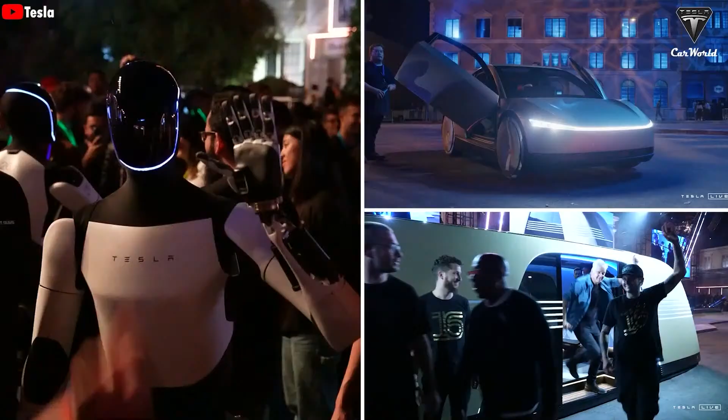It is hard to believe that in just over an hour, Tesla introduced three super products. But instead of the crowd focusing on the two new cars, the people at the event focused on Optimus, because this is the first time they could talk in real time with a humanoid robot. It can answer questions in just one second of thinking. The important thing is that the answer is completely unprogrammed.

It thinks and answers by itself. Not stopping there, Tesla also showed a series of new actions of Optimus to prove that it is worth much more than the $20,000 that customers spend, homemaker ready.

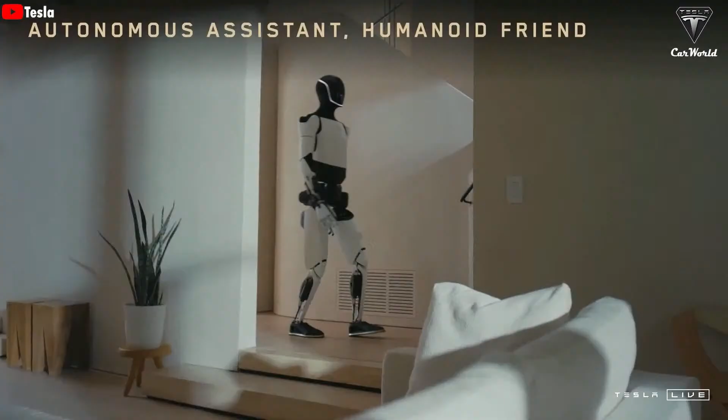It's incredible to see Optimus pick up a package, check it, and bring it inside the house. You can also see it watering the plants, interacting with family members, or even more insanely, opening the trunk of the car and taking the items into the house. The robot's movement speed is much better than earlier this year, and the way Optimus's hands move when holding objects is incredibly secure, and the whole arm can be manipulated quite naturally.

So it can be a teacher, babysit your kids, it can walk your dog, mow your lawn, get the groceries, just be your friend, serve drinks, whatever you can think of, it will do.

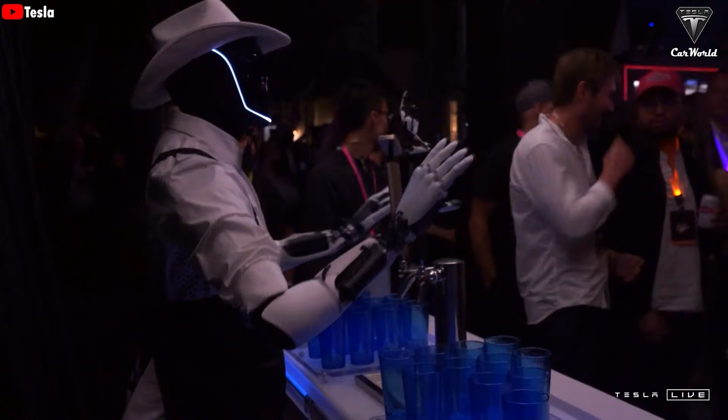What does this mean? Clearly, all these new upgrades and tasks show that Tesla is truly turning the Optimus robot into a versatile homemaker, something no other competitor has come close to achieving yet.

But that was not the most impressive thing at the event. Elon Musk inspired a party that most people enjoyed when a team of about 7 Optimus robots performed a pretty professional dance, one of which was also dressed in clothes and a cowboy hat, acting as a bartender, serving drinks and giving gifts to the event attendees.

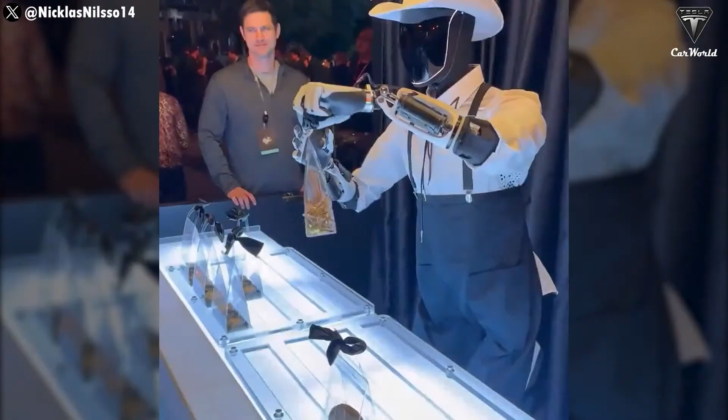While these aren't custom-made drinks, just two pre-made drink options served from a beer tap, the robots seem to have done a pretty good job, although they do wobble a bit when serving drinks, which seems odd, as if the robots aren't very good at balancing, or their movements aren't properly damped. Or maybe it's the clothes and hat that make it seem even more distinct.

Before this event, Tesla had never shown any videos demonstrating Optimus's interaction capabilities, leading many of us to believe that these robots could hardly recognize and communicate with humans. Oh my God, and we were all wrong.

The Optimus robot truly stole the spotlight, and what had people talking even more than the robo-taxi technology was its astonishing ability to communicate and use body language.

It was so impressive that many assumed Optimus's voice had to be controlled remotely. There's no way a chatbot could operate in real time like that.

And you can see, here is one of the videos that shows the amazing interactivity of Tesla Bot.

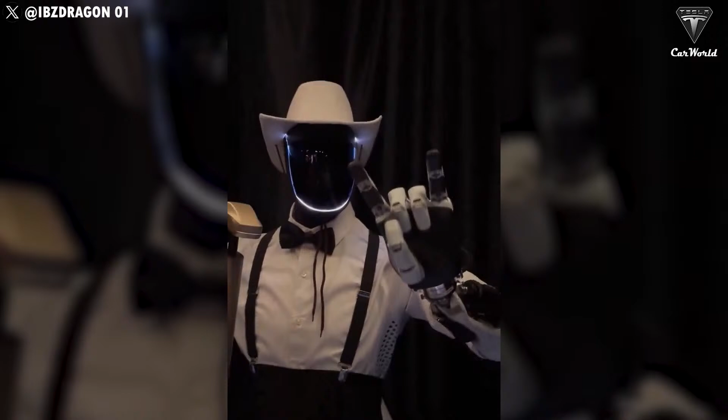I got another one. There you go. Oh. Yeah, hell yeah. Yeah. Can you give a hell yeah, Optimus?

Not only that, it also asked the user's name and sang him happy birthday, which further increased the amusement of the surrounding crowd.

I'm Chad. Chad? Yes. All right, everyone, let's all sing happy birthday together while I dance. Yeah, baby. Do it. Happy birthday to you, happy birthday to you.

It's clear that it answered all the questions posed to it succinctly. These were random questions from event attendees, and they weren't preset or programmed to give the same response. It's obvious that it used AI to think and come up with its answers, which is what drew a crowd around Optimus.

Even more so than the event's main attraction, Cybercab. This shows just how captivating Tesla's humanoid robot really is.

Each robot we saw had a different voice, even though most of them had either a California or Texas accent, which are two places where Tesla has a significant presence. One of them was even said to speak Spanish, impressing an attendee.

In reality, having a humanoid robot that can communicate isn't all that difficult for Tesla. What makes it impressive is how it uses body language and performs actions along with its responses. For instance, instead of just saying 'Happy birthday,' it actually sang. You can even ask it to strike poses or perform actions, and it follows through.

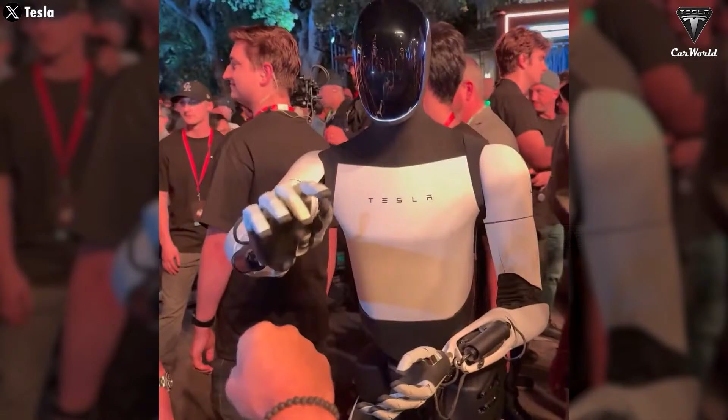Another instance caught our eye, which shows how close the robots are to behaving like humans. Here, the user asks the robot whether it knows how to play rock, paper, scissors. It is interesting that the robot was well aware of the game and its rules. And then it was literally human versus robot. And guess what? Humans are still better. But one thing is clear, Optimus is not a sore loser. It complimented the opponent saying, 'You're very good at rock, paper, scissors.'

You might not know this, but Tesla is really good at gathering training data. Even this event generated a ton of training data for Optimus, meaning everything it was asked to do is recorded. It will remember the faces of everyone who interacted with it.

This is exactly what customers want from Tesla's humanoid robot. Earlier, Elon Musk explained that we can even customize Optimus's language and voice. Musk said, 'Yeah, you'll be able to customize the personality, customize the voice, and really kind of the robot will kind of get to know you as well and know your preferences. You won't even have to say things because it'll just kind of understand you.'

What if we got bored and could chat with it for hours looking for some knowledge instead of using ChatGPT? We could listen to it tell stories, share news, give weather updates, or even ask it to clean the entire kitchen and cook dinner. Oh my God, it can clearly do all of that.

Elon Musk has made extensive predictions about Optimus's potential, declaring it to be the biggest product ever. He anticipates that Tesla will eventually produce millions of them, suggesting that widespread adoption of Optimus could elevate economic output by two levels and contribute to a future without poverty.

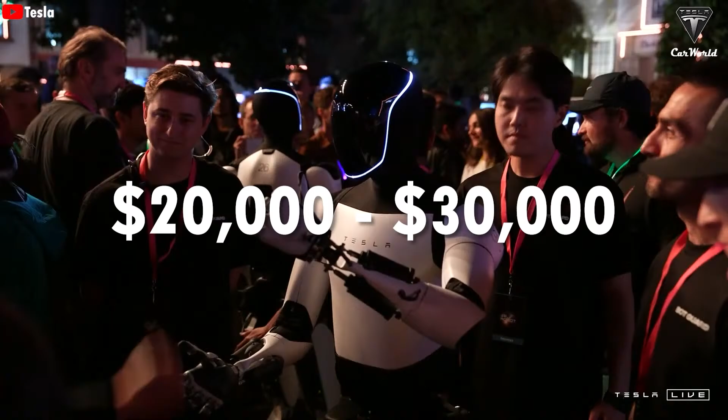Earlier this year, Elon Musk confirmed that Tesla could start selling its humanoid robots by the end of 2025. He revealed that in the long run, the price of the Tesla Optimus robot is expected to range from $20,000 to $30,000 when production reaches a large scale. This means that in the initial phase, the price could be significantly higher due to substantial research and development costs, an optimized manufacturing process yet to be established, and the mass adoption of advanced technologies.

In our most optimistic estimates, the starting price for Optimus could fall between $50,000 and $70,000. While the initial price may be high, there is no denying that Optimus can be a valuable long-term investment that will allow us to recover our investment very quickly.

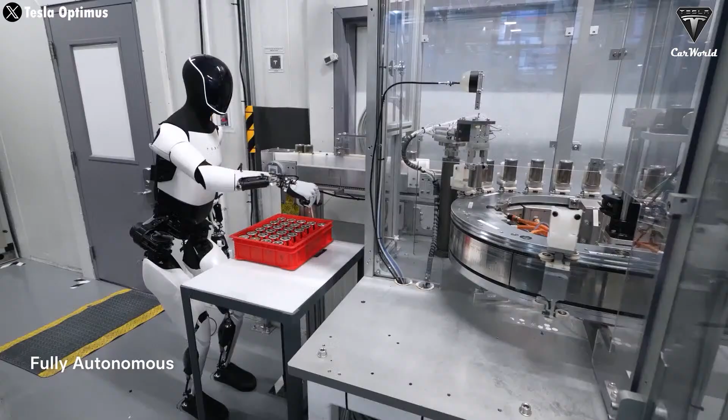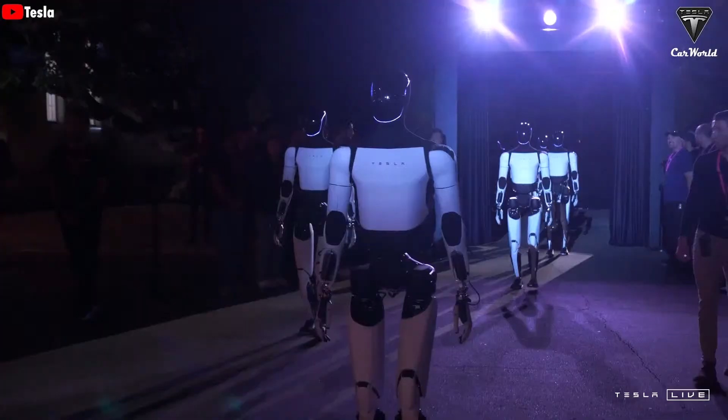With the ability to automate manual tasks, from industrial production to care for the elderly and disabled, Optimus not only helps reduce labor costs, but also significantly increases productivity. In addition, as technology continues to improve and optimize, the benefits of robots will far exceed the initial cost, especially in industries with high automation needs and continuous performance requirements. So while the starting price may reach $50,000, the potential cost savings and increased value that Optimus brings in the long term can easily make up for this initial investment.

Don't forget that this is just the initial cost. When Tesla has enough quantity, it will definitely drop to $20,000, half the price of an electric car, as Elon Musk said. In the initial phase, according to Musk, Tesla's Optimus Gen 1 will mainly be used internally at Tesla factories, with around 1,000 units or more to support production and refine operational processes.

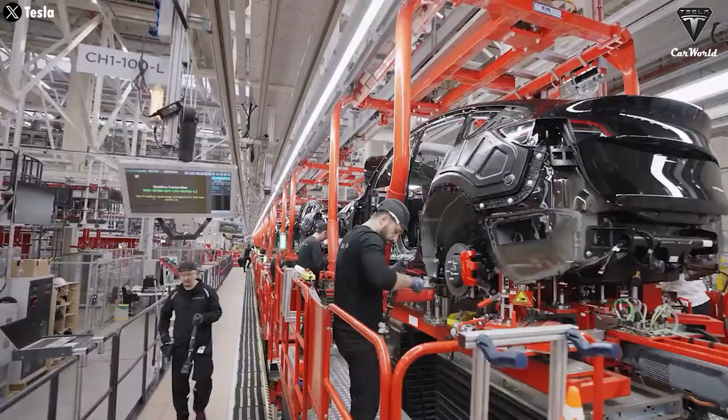This will allow Tesla to replace some workers in an effort to reduce labor costs and optimize the utility and performance of Optimus before it officially hits the market. Generation 1 will be quite limited, and Tesla might not sell it to customers.

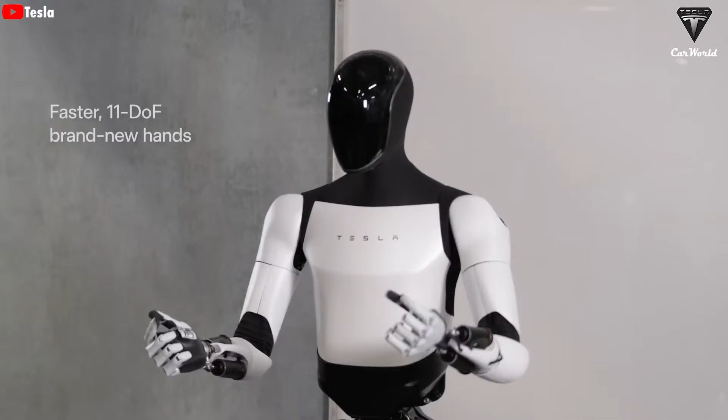When Optimus Gen 2 becomes available, Tesla plans to start offering it to external customers, including high-profile individuals and large corporations facing labor shortages, such as Amazon, FedEx, and Walmart. These are the potential early adopters of Optimus, and they may be willing to pay as much as $50,000 or more to own one of the first robots.

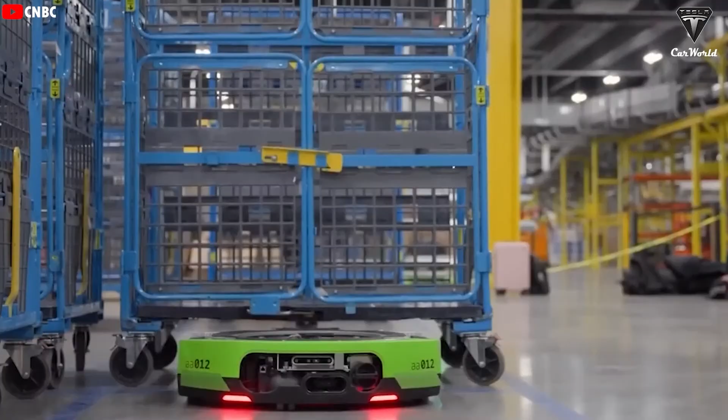Not only because of its advanced automation features, but also due to the brand value and exclusivity of the product. Businesses can use Optimus to enhance productivity and operational efficiency, while celebrities might see the robot as an assistant that helps them tackle tasks they don't have time for. Tesla stands to benefit significantly, as celebrities using Optimus would provide substantial marketing for the company. Prioritizing the distribution of Optimus to celebrities and large companies could create a powerful ripple effect, generating interest and rapidly expanding the market for this product line.

Before Optimus goes on sale, Elon Musk has also mentioned that the company will offer a rental program for the robot as a way for customers to experience the product before making a purchase decision. We anticipate that the rental price won't be too high, estimating it to be between $100 and $500 per month.

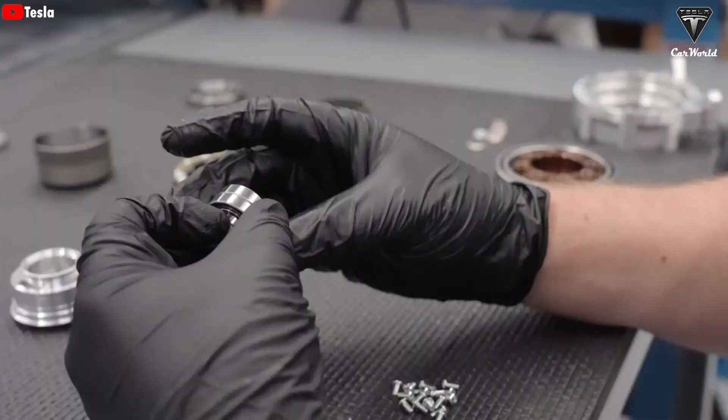There's no denying that this year, Tesla has put a tremendous amount of effort into rapidly refining its robot. You need to understand that creating something humanoid has never been easy. However, for a company that specializes in electric vehicles, to take less than 3 years to bring a humanoid robot to events and showcase its various capabilities is truly impressive. Tesla has really outpaced its competitors, even those companies that specialize in robotics like Boston Dynamics.

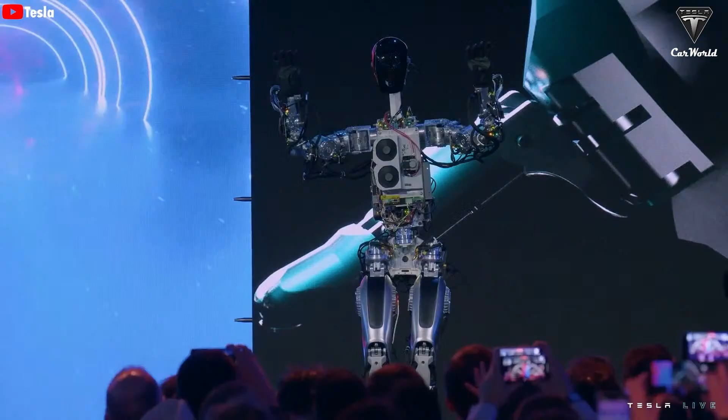This earthquake really broke out at the end of last year, when Tesla suddenly launched the latest version of the humanoid robot, Optimus Gen 2, which no one expected, because in March Tesla released Gen 1 — meaning it only took about 8 months for them to upgrade to the high-end version. Not only did it bring a robot with a smarter, more modern design and eliminate a large amount of metal, Optimus Gen 2 also brought notable upgrades: a pair of faster legs, a hand with more joints and tactile sensors, and a smarter brain.

Not long before that, the video of Optimus demonstrating a new skill of folding clothes in a few seconds attracted attention. In the clip, the robot picked up a shirt from a basket and folded it neatly on the table. This was the moment when everyone believed that Tesla had really developed the role of homemaker for Optimus.

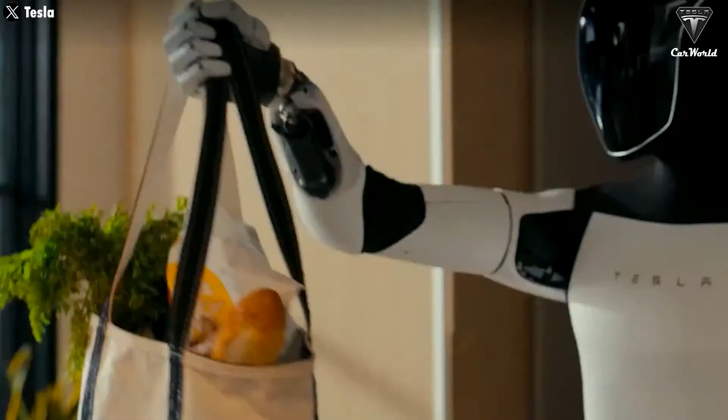After the We, Robot event, we realized that the reaction to Optimus's real-world debut was quite mixed. While the majority of users praised the technology for being far superior to any competitors, and its interactions were surprisingly impressive compared to what attendees had imagined, some others felt differently. They believed the robot's interactions seemed to have some human interference, suggesting that Optimus was actually being remotely controlled, and that the responses it gave were being provided by Tesla employees.

The truth is, when something appears too good to be true compared to our expectations, people tend to jump to negative conclusions. We don't believe Tesla would be foolish enough to host a major event, bring at least 37 humanoid robots, and have guests witness them being controlled remotely. They wouldn't be dumb enough to risk a pre-programmed robot crashing their stock, which had already risen thanks to the Cybercab. As you can see, the event was very crowded, with people standing close together, so if Tesla employees were manipulating and controlling the robots, they would have been detected immediately.

In addition, Tesla would not have produced large numbers of robots in the first place if they were not technically advanced. So when we saw such a large number, this means Tesla had already qualified the technology for these robots instead of bringing unfinished machines to the event. We think Tesla produced more than the 37 units that appeared at the event, as some others were still being assembled and built in the factory.

So the fact that the Optimus robot was remotely controlled during the event was just a negative comment meant to make people underestimate Tesla and their robots — not to mention whether it was actually controlled or not. Its manipulations, actions, and skillful hands prove that Tesla is far ahead of its competitors.

We'd like to talk a little more about the Tesla Cybercab and Robovan, two models that are also being widely discussed. As for the affordable car, the $25,000 Model 2, we'll talk about why it wasn't unveiled at the event in the next episode.

As we have seen, not only Optimus, but Cybercab and Robovan are also two fully self-driving models of Tesla. They are considered robots, but have wheels instead of legs like Optimus.

With Cybercab, it is completely different from what people have speculated before. Cybercab has a compact design, like Cybertruck but more sophisticated. The entire car is painted in glossy gold, with details made of stainless steel to optimize durability.

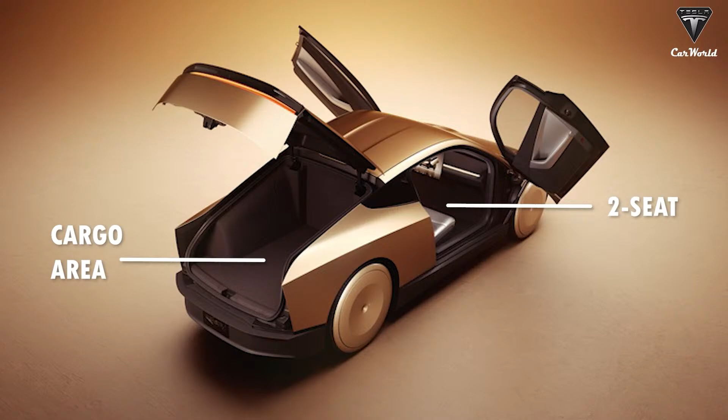Notably, the car is equipped with a self-cleaning system to maintain hygiene, particularly useful for frequent use as a self-driving taxi. The expected price is under $30,000, and the operating cost is around 20 cents per mile. The Cybercab has a range of about 200 miles and can be wirelessly fast-charged in just 15 minutes.

With the Cybercab, Tesla emphasizes that they rely solely on cameras and AI software, no radar or LiDAR needed. In the future, Tesla may allow owners to use their vehicles as robo-taxis to generate income, where Tesla would take 30% of the revenue and the owner would keep 70%.

Meanwhile, Robovan blew people's minds with its unique design. Robovan can carry up to 20 people or transport large goods at an operating cost of $0.05 to $0.10 per mile. Like Cybercab, Robovan will have no pedals or steering wheel, just seats and large screens inside the car. According to the event, Tesla will focus on Robovan in future events, considering its ability to serve as public transportation.

Optimus has become an important part of Elon Musk's long-term strategy, as he envisions the robot playing a key role in Tesla's future. Since its debut in 2021, Musk has envisioned a future where Optimus can not only do everyday human tasks like housekeeping and cooking, but can also be used in industrial and commercial environments. Musk even believes that Optimus could be a huge revenue generator for Tesla, turning it into a financially limitless product.

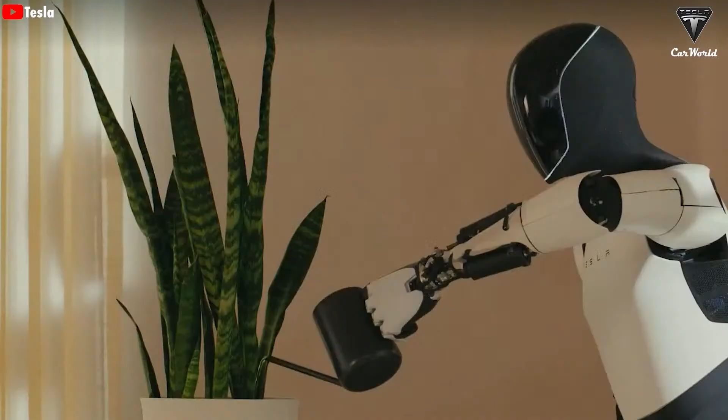In our opinion, it will probably be a year or two before consumers see Optimus bots in their homes. By then, it will have a lot of utility and features that go beyond what is available today.

What do you think of Optimus after Tesla's recent event? What do you expect from these robots? And discuss the issue of it being remotely controlled in the comments below. We want to know your views.

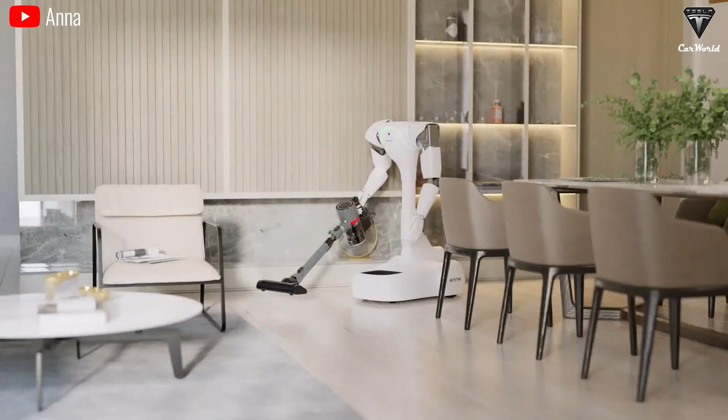Just imagine coming home from work with a pile of house chores still waiting for you. Yeah, it's going to stay that way until you have an Optimus living at home with you. The reality is, the idea of owning a robot at home and asking it to handle a bunch of tasks that you either can't or don't feel like doing has never really caught our attention, because no one thinks a slow-moving robot is actually going to replace us humans. More accurately, this scenario has only existed in sci-fi movies. However, Optimus is that real-world robot stepping straight out of the movies you've watched, with the exception of T2.

But seriously, it can fold clothes, water plants, handle slippery objects like eggs or battery cells, and even use a computer. It can also dance, it can squat, it can move around the office with an incredibly natural human-like gait. So you could say pick up a cup, pick up a shirt, fold the shirt. These things will generalize, I think, quite quickly.

But that's just the most basic glimpse we've seen of the Optimus. Imagine putting it in a clothing store where it can fold and pack thousands of shirts for customers every day. No more having to pay people to do all that. Farms wouldn't need complex irrigation systems if these robots were involved. Or even crazier, it could grab eggs and make breakfast for the kids every morning.

So, stepping out of the realm of movies, this is the real-world role of Optimus. It brings mind-blowing convenience, some of which can directly translate into financial benefits for businesses using the Tesla bot. However, to achieve all this, Optimus's hands are considered its most critical feature, and it's where the Tesla bot team has focused most of their attention.

Just like humans, we'd be almost incapable of doing any task without our hands. A pair of hands with 27 degrees of freedom combined with a brain are two things that make us humans the most intelligent beings on the planet. Now, when manufacturers create a humanoid robot, the brain and hands are the two areas on which they focus most.

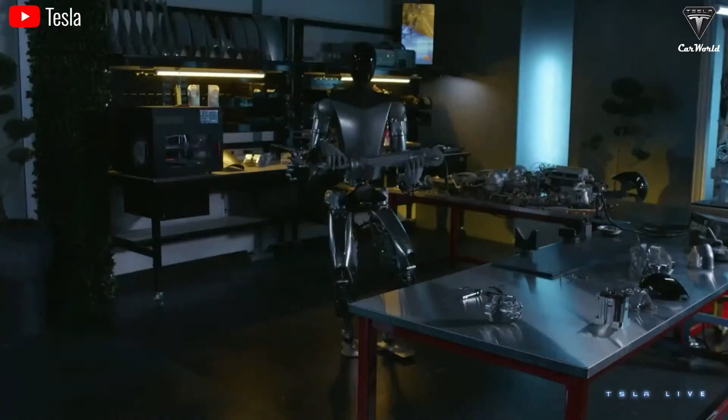As we've mentioned before, our hands have 27 degrees of freedom. However, some of you may not fully understand what degrees of freedom in the body actually means, so let's review real quick. Simply put, degrees of freedom describe the number of ways a mechanical system can move. In the context of a humanoid robot's hand, it refers to the independent movements each finger or part of the hand can make. As you can see with Tesla bot's hand, it can continuously move its fingers like a normal human's, which is something Tesla's competitors have not quite figured out yet.

If you want to have a humanoid robot that can do things that a human can do, it's a very high bar. So our new hand has 22 degrees of freedom instead of 11. This is what Elon shared about the latest hand design for Optimus.

To develop the world's most advanced robotic hand, the key component that makes Optimus truly useful for humans, Tesla has had to overcome some major hurdles. In a conversation with Lex Fridman, Musk admitted that the hand for Optimus accounted for about half the engineering work during development. Because, like humans, much of our intelligence is tied to what we can do with our hands, Tesla's upgraded from 11 to 22 degrees of freedom, a leap that doubles the previous version, bringing them just 5 degrees shy of a human hand.

Imagine if in the future Optimus gets 27 degrees of freedom. Now, that might not happen immediately, but if it does, its hands will reach an incredible level of complexity and sophistication, unlocking potentials far beyond what we can imagine.

With hands like that, what else could Optimus do? More complex tasks, of course. It could handle intricate surgeries, perform delicate laboratory work, repair advanced machinery, or even create art. The possibility for high precision tasks in fields like healthcare, engineering, and manufacturing would expand tremendously, potentially reshaping industries and everyday life. Like in 2026, it's really the kind of thing where you could tell it to do a wide range of tasks.

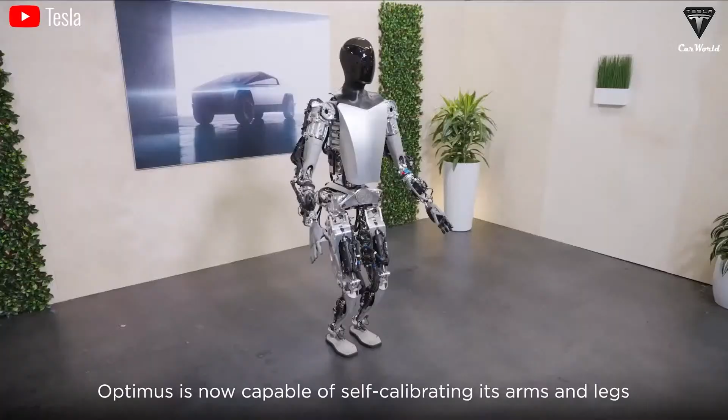You need AI, you need to be the best in real-world AI, and Tesla's the best in real-world AI. Optimus is equipped with Tesla's artificial neural network and advanced computer vision systems. Thanks to Tesla's neural network, Optimus can learn and handle complex tasks just by observing for the first time, and it can relearn really quickly, as Musk said. It can watch a video of something like a person doing a task and then learn just by looking at that video and do that task.

A lot of people are wondering how these robots will learn new tasks and how long it takes to train them before they can get the job done. Obviously, they just need to watch a video, and you don't have to do anything else. Imagine if you had a robot like Optimus at home teaching you how to play the piano, something you feel like you can't teach yourself. It just watches a video of someone playing your favorite song, then analyzes the hand movements, the chords, even the rhythm, and guides you step by step, just like you're learning from a human teacher.

Our next generation has 22 degrees of freedom. It will be able to play the piano.

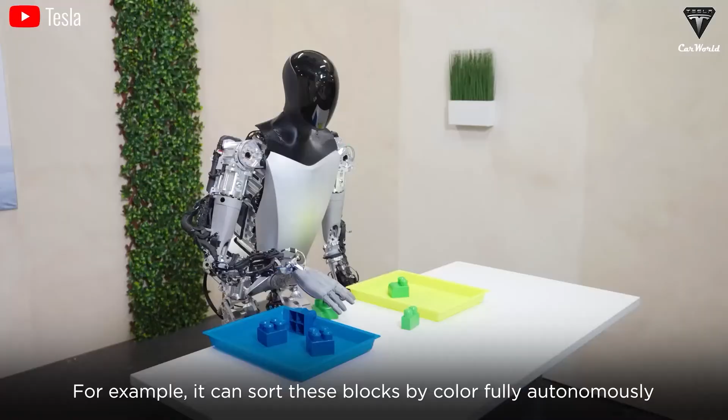So it's really like, wow, that would be amazing. You wouldn't just get instructions—you'd actually get the robot to demonstrate it for you, correcting you if you got the wrong chord or lost your rhythm. It could even create a fun practice session, encouraging you to improve every day.

And what if you like cooking? You could pull up a video showing how to make your favorite food. The robot would watch and learn from that video, then help you from start to finish. It will remind you to gather the ingredients, guide you step by step, and even adjust the recipe to suit your taste. Instead of fumbling through a cookbook or watching a long tutorial, you'd have a personal chef right in your house to assist you.

Those are the more complex tasks that Optimus can do with its hands. While the artificial neural network allows Optimus to self-learn new tasks, its computer vision system ensures the robot accurately perceives its surroundings and objects. In the promo videos Tesla has shown us before, the vision system simply allowed it to recognize objects in color, sorting them accordingly.

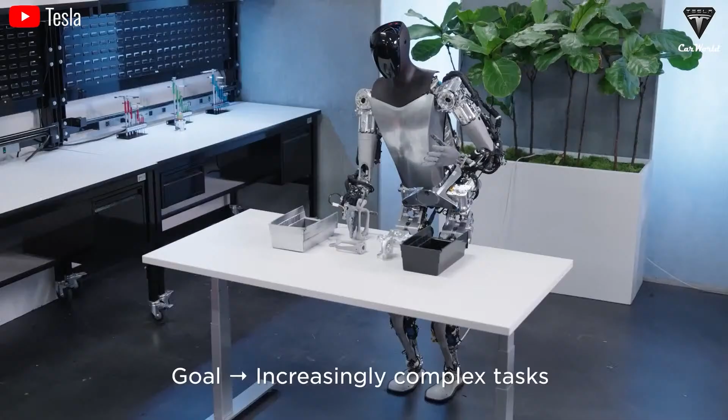The reality is, this vision enables Optimus to accomplish tasks you wouldn't even expect. Thanks to this system, the robot can analyze and accurately identify everything around it. For example, when moving around the house, Optimus can recognize objects like tables, chairs, even a cat lying on the floor. In more complex industrial environments, especially in a massive factory like Giga Texas, Optimus will also optimize terrain recognition capabilities. It can transport goods while ensuring the safety of those around it, recognizing obstacles like people, machines, and cargo, and deciding on the safest route to take.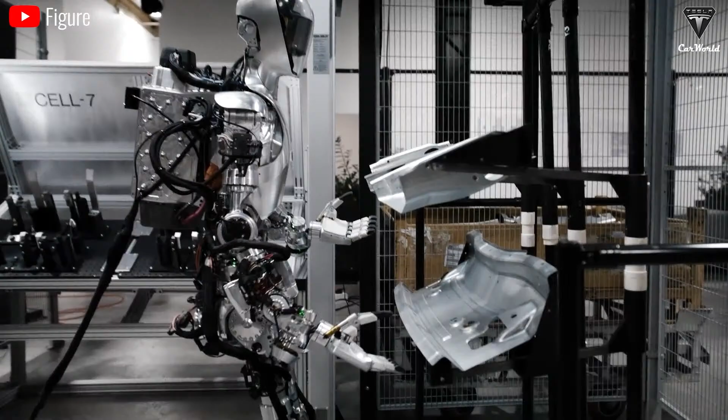With these capabilities, Optimus could become a valuable office assistant, helping you manage daily tasks. For example, it could quickly and accurately respond to emails, contact partners to send necessary documents, and remind you about your work schedule. Optimus could even organize meetings by suggesting suitable times for everyone and noting down important points during discussions. With its impressive actions and flexible movements in an office environment, the idea of Optimus as an assistant does not seem that far-fetched.

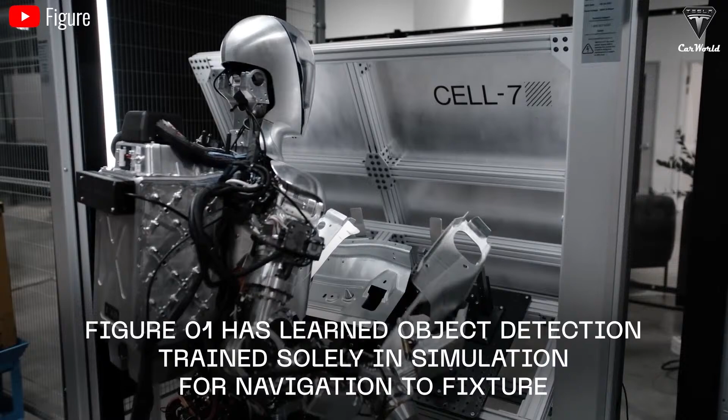In fact, it's possible that one day it'll be standing next to you, helping you work much more efficiently and making more money. There are many other tasks Optimus could take on, like educating kids or participating in EV production at Tesla, which Elon has already talked about. However, it's hard to go into detail since we still need to wait for its launch and final performance specs.

There are about 5 more updates that Elon announced for the Optimus Gen 3 version. In addition to its hands, Optimus will feature a new design using lighter materials to reduce the robot's weight. This design will include new features like LED lights and a display on its face to show work progress and status.

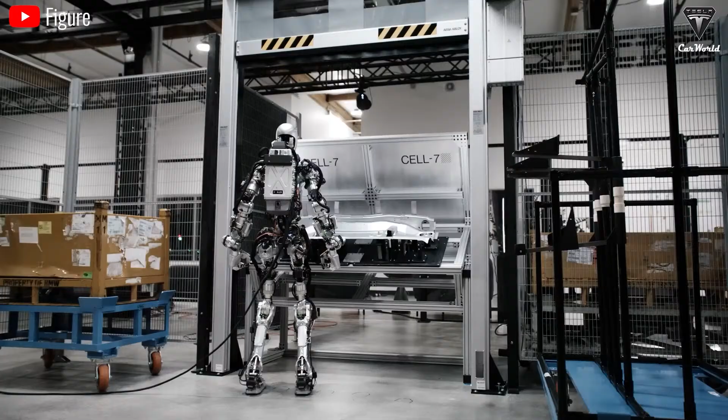Another upgrade will be movement speed. Right now, Optimus goes at a speed of about 0.6 meters a second, which is kind of slow, but Tesla plans to boost that from 2 to 3 meters a second. This upgrade will require improvements in hardware components like motors and joints to enhance efficiency and stability.

Elon confirmed that these hardware modifications are crucial for improving the robot's agility, allowing it to navigate different environments from factories to houses. Next up is the addition of voice and language, which is a crucial feature that will enhance user interaction. The upcoming Gen 3 version will be able to communicate in multiple languages and understand user preferences, making it more adaptable globally. Users will have the option to customize Optimus's voice and personality, allowing the robot to function like a personal assistant that can communicate naturally.

And finally, Tesla will focus on improving Optimus's learning and adaptability. With the implementation of video-in, controls-out neural network, the robot will be able to observe tasks and automatically replicate them. This development not only positions Optimus as a household assistant, but could also turn it into a healthcare companion, monitoring health conditions and giving timely alerts. By integrating with Tesla's existing FSD technology, Optimus will benefit from ongoing improvements in AI performance and decision-making capabilities.

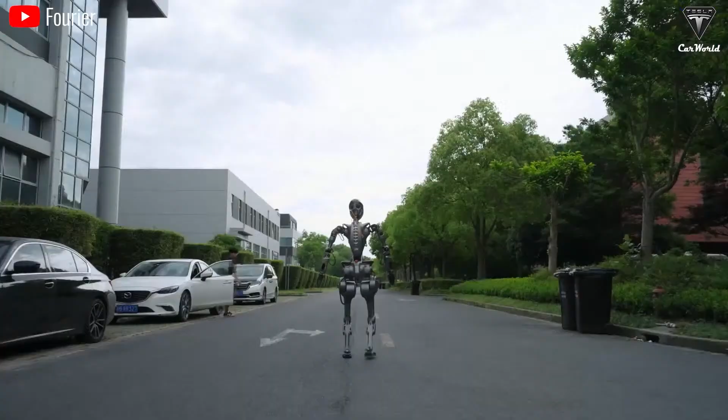These 5 upgrades will allow Tesla to reach new heights in developing an almost perfect version that can very closely mimic us humans, expanding its potential applications across various fields. After all, while Optimus is considered the world leader in humanoid robot technology and creates massive demand to change how people work, wherever there's technology, there's going to be competition.

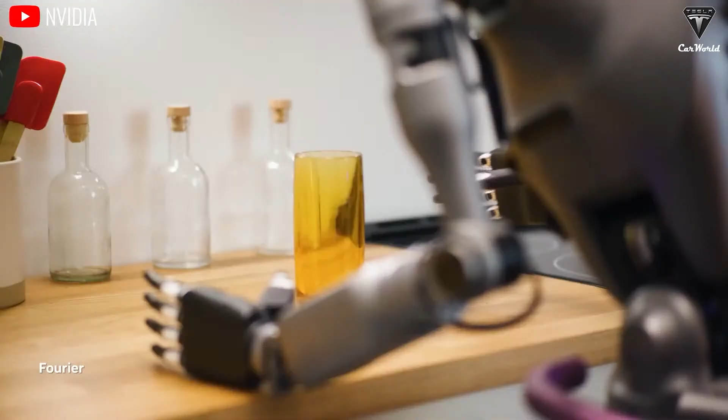And when it comes to tech, China's right there with it. So if you pay attention, you'll probably notice that since Tesla created a buzz with Optimus by launching the Gen 2 version late last year, a host of other robot companies out of China have suddenly come up out of nowhere. And when China focuses on something, it tends to become a trend because they'll likely flood the market with it. So robots are definitely what they're targeting.

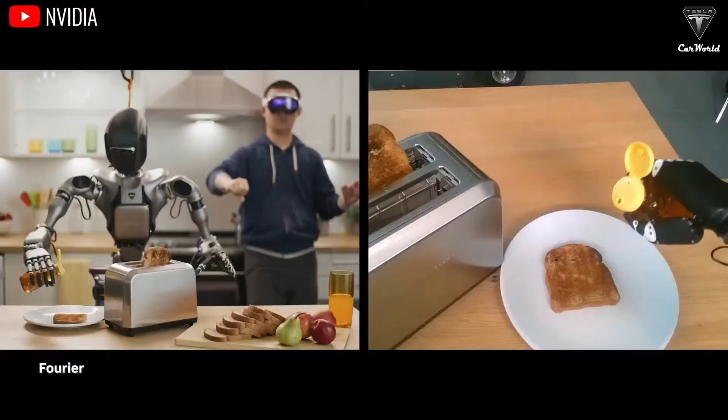Goldman Sachs predicted back in January that the global market for robots will reach $38 billion by 2035, with nearly 1.4 million shipments for consumer and industrial applications. They estimate that the material costs to make them dropped to around $150,000 each by last year, not including research and development expenses. To achieve a price of $20,000 for Optimus, Elon has had to break down numerous factors to make it accessible for customers.

If you look at a few humanoid robots currently out there, prices go from $70,000 to $120,000, so they're definitely not cheap. To hit that $20,000 price point for Optimus, Elon admitted that Tesla has managed to bring production costs down to just $10,000. The reason is that they have access to batteries, motors, sensors, and many hardware components that can be shared with Tesla's electric vehicles.

Moreover, they've got big factories for producing Optimus, and FSD software is already there, meaning they don't have to rely heavily on outside suppliers to make these robots. That's a big advantage for Tesla. Although Optimus is generating lots of buzz and demand, it still faces intense competition. With rapid advancements in China and other parts of the world, Tesla will need to adjust its production to keep up with the increasing demand and technological progress. Optimus could be the key to the next major revolution in automation.

From impressive developments in robotics like Boston Dynamics' Atlas to Tesla's Optimus robot, we're seeing major advancements in robotics and AI. However, while these advancements promise to open up new opportunities, manufacturing and deploying them in real-world environments still present some challenges. Optimizing the physical processing capabilities of robots, along with their interaction with surrounding environments, is essential to realizing the vision of a world where robots can take on a wide range of diverse and complex tasks.

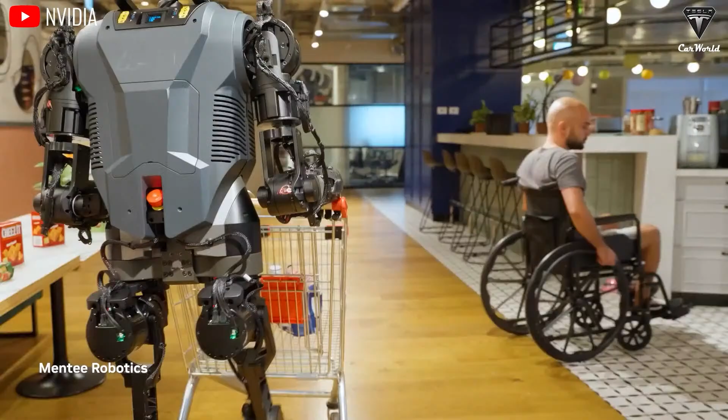While current robots mainly operate in controlled environments like factories and warehouses, their future will depend on the researchers' ability to develop not just software, but also hardware. As analysts have pointed out, to achieve general artificial intelligence, humanoid robots need a physical form to effectively understand and interact with the outside real world. The development of these humanoid robots and new designs, although promising, also needs to be approached a lot more practically.

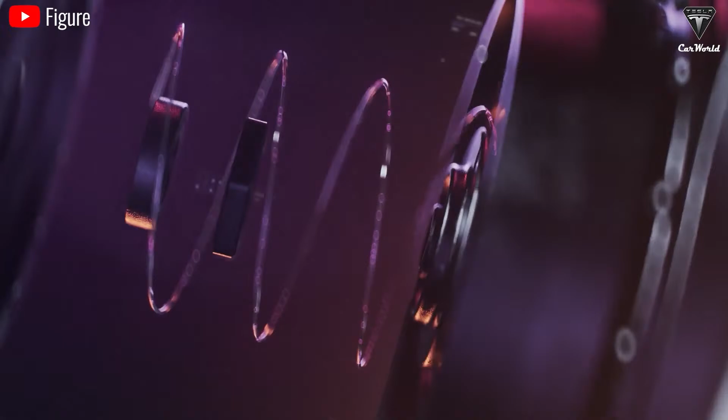Researchers emphasize that robot designs don't necessarily have to resemble humans. They should just be optimized for specific tasks. This indicates to us that as technology continues to evolve, finding the optimal design for each type of robot will be key to realizing their potential in our everyday lives.

So, we want to ask you, the viewer watching this video, what features do you think are more important for Tesla robots to meet your needs? And what are you most looking forward to in the next version of Optimus?

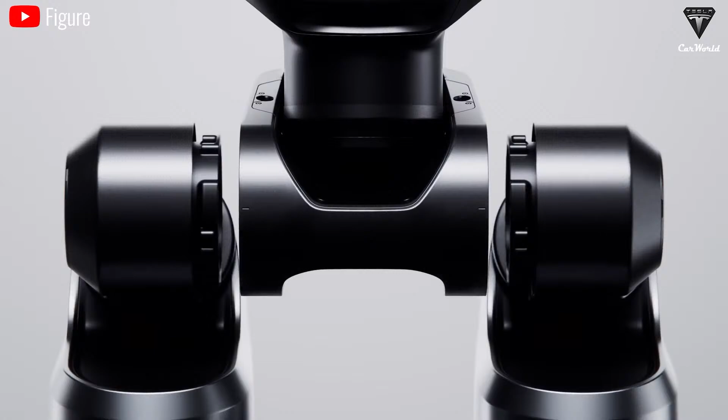Musk said it only cost Tesla $10,000 to make an Optimus robot, and he's planning to sell them to customers for $20,000. That means for every 100,000 sold, Elon makes $1 billion. Pretty wild, because he said he plans to make billions of Optimus, turning Tesla into a $25 trillion company.

Building a humanoid robot isn't like putting a Model Y on the assembly line. It's obviously a lot more challenging since it's AI. But Elon keeps saying Optimus is going to cost half the price of an electric vehicle. So what makes it so affordable?

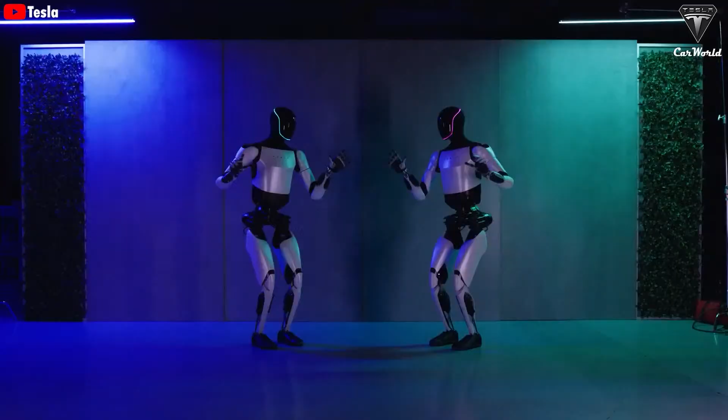So in order to have the robot not cost like hundreds of thousands of dollars, in order to make it cost like $10,000 or $20,000.

The truth we can't deny is that robots still haven't gained widespread acceptance among most people. In our opinion, the main reason for this is the lack of achievements or evidence proving that they're truly useful for customers who've got the money to spend. No one's trying to shell out $20,000 for a robot that functions like a toy that just moves from one part of your house to the other. Now, some ballers might be buying it, but the majority of us aren't.

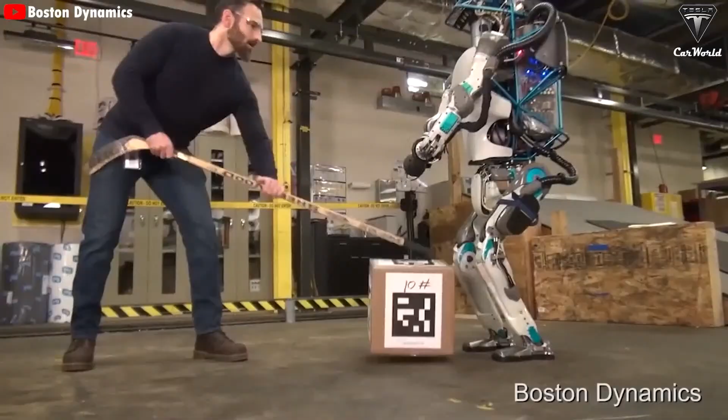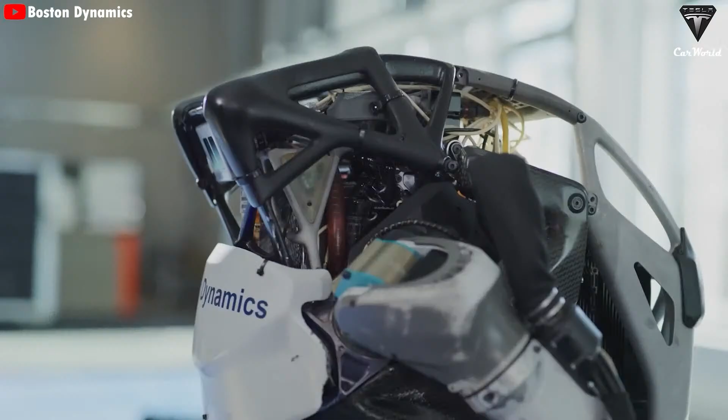From a certain perspective, we see that Boston Dynamics' Atlas has been highly regarded for its agility. It's one of the first robots to convince people as it's demonstrated the ability to do complex tasks like parkour and transporting goods, skills that most robots, including the Optimus, still can't do. However, its high price tag, around 150 Gs, equivalent to 2 Model S cars, makes it pretty inaccessible. That's part of the reason it hasn't gotten traction and essentially been shelved despite being developed over several decades now.

And we're not just talking the Atlas, it's tough to find any robot priced under $50K, and that's what makes Optimus stand out. Elon's mentioned at least 3 times that the price is going to be half of an electric car, with Tesla making it for just $10,000. It is expected to cost much less than a car.

I'll just bring it directly to the right here. I would say probably less than $20,000 would be my guess.

When talking about a price tag at $20,000 for something in Tesla, it's really unbelievable, and there's no guarantee that Elon can maintain this price when he's always the person who breaks his promises about timelines and the amount of money that customers have to pay.

But for Optimus, we have a basis to believe this price when almost all the expensive tech on Optimus is not purchased from suppliers, meaning that Tesla will transfer a lot of things they do from EVs to their humanoid robots. Relatively speaking, Tesla has the production capability, it has the engineering capability, and it has the AI hardware and software capability.

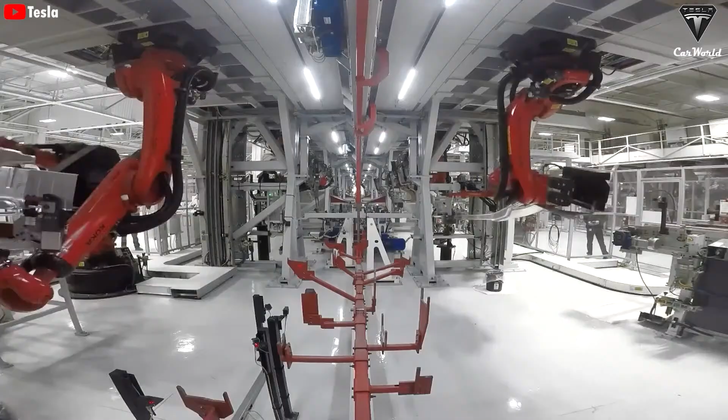Efficiencies gained from making robot cars and automotive manufacturing robots will immediately translate into the humanoid robot project. That's exactly what makes Optimus affordable. From the perspective of a robotics company, Tesla's got the right tools and talent to assemble the robots cost effectively.

According to Karpathy, who was still at Tesla when Optimus began, Tesla conducted a significant amount of research into self-driving tech and has become one of the most advanced autonomous driving systems out there now. All the knowledge gained and artifacts created while developing self-driving technology are getting transferred to the robot. This is what makes developing a humanoid robot less expensive.

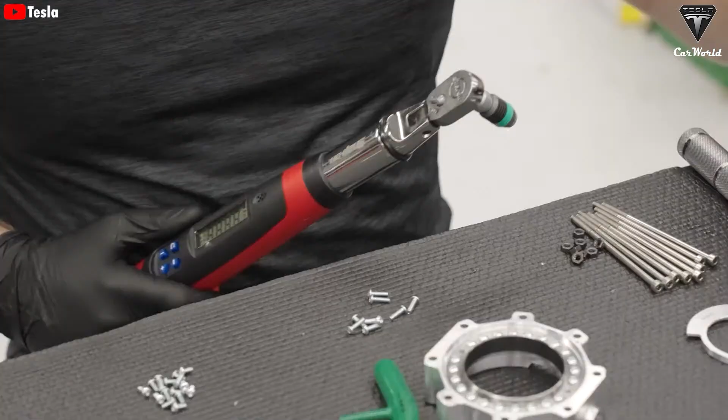So it's not surprising that Tesla's bot can get priced lower, especially among manufacturers. Truth being, only Tesla has the best potential for scaling up their production. Tesla's got large factories, battery production lines, and companies that don't need to get built from scratch.

Elon also emphasizes the importance of having some of the world's best electrical engineers in areas like drive systems and electric motors, as well as power electronics for developing Optimus. This is why the company can spend just 10 grand to produce it and bring Optimus to a market price of $20,000.

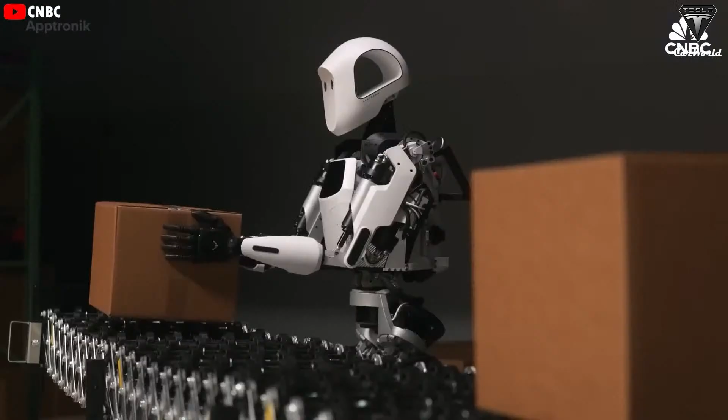Taking a quick look at Tesla Optimus, because besides being just a humanoid robot, most of us just don't know that much about it. Now, there are a few types of robots out there right now, including robotic arms that are used in electric vehicle production and robotic dogs, with each robot designed for specialized tasks.

Optimus, however, is getting developed to address the growing labor shortage by providing a potential alternative for manual labor. In the latest Gen 2 update, Elon mentioned that he envisions these robots having applications beyond industrial settings, doing household tasks, the boring, repetitive, mundane jobs that you just don't want to deal with.

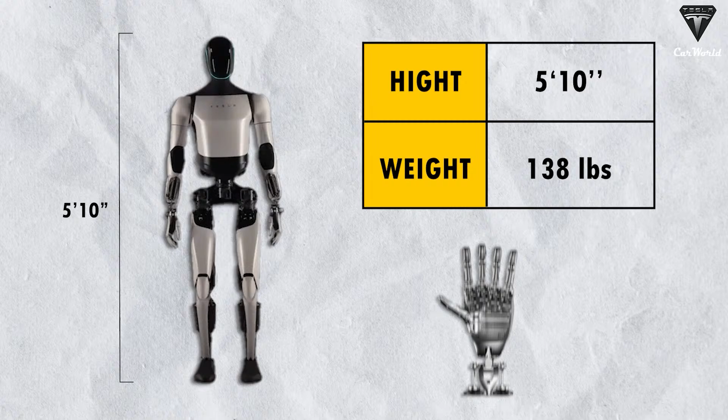Taking all human standards into account, Optimus is arguably the most human-like robot compared to much of the competition. It's got a standard height of 5'10", weighs 138 pounds, and features a fully articulated hand with 5 fingers, something very few robots achieve. The heart of Optimus will be a conventional lithium-ion battery pack, while Tesla electric vehicles typically have battery packs from 60 to 100 kilowatt hours.

The robot's battery is going to be much smaller, with Tesla sharing it's only around 2.3 kilowatt hours. Optimus' vision system is equipped with a variety of sensors and 8 2D cameras to see its surroundings, allowing Optimus to identify objects in the real world while navigating the environment without colliding into other objects.

In addition to deploying thousands of these robots in Tesla's factories, Elon emphasizes that the goal of developing robots is to serve millions of households, doing things like cooking, mowing, caring for the elderly, educating kids, and handling any other household chores. While it's easy to envision scenarios where many people might lose their jobs to these robots, we often overlook the benefits that manufacturers gain with each robot being deployed in Tesla's factories.

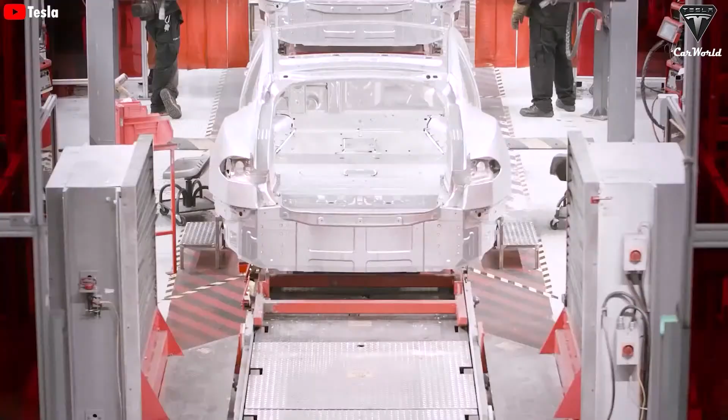According to analysis from Deutsche Bank, assuming a manufacturing worker earns $62,000 a year while working 40 hours a week in 2027, Tesla could save almost $32,000 by replacing them with a robot. Deutsche models suggest that replacing just 10% of these workers could lead to annual savings of $141 million.

If the same worker continues with the company and earns close to $73,000 a year by 2030, Tesla could save $57,000 by putting a robot in their position. Repeating this process until 20% of the workers are replaced could result in savings of nearly $510 million annually.

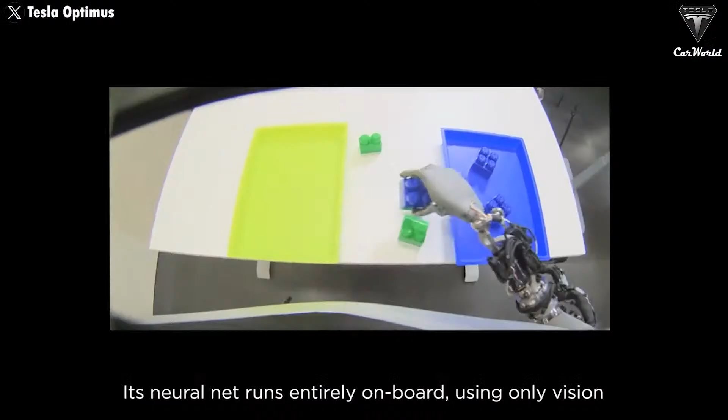Deutsche Bank noted. What Tesla accomplished with the robot in just 3 years is very impressive. They've shown the robot walking smoothly around the office in a video demo, demonstrating Optimus maintaining balance while doing squats, sorting blocks by color, and putting 4680 battery cells into trays.

Tesla showcased Optimus picking up eggs without breaking them. Some footage even shows Optimus Engineering's team training the robot to fold clothes and put basic items on shelves. All this demonstrates that Tesla's working hard to train Optimus to do tasks in the most useful way possible, something that most humanoid robots out there today, at least for now, cannot achieve.

And so the simplest possible version of a humanoid robot that can do even most, perhaps not all, of what a human can do is actually still very complicated.

It's not simple, it's very difficult. We can confidently say that Tesla's come a long way in a short time, making progress in developing robots in less than 3 years. In contrast, Boston Dynamics has spent decades creating their robots with similar capabilities.

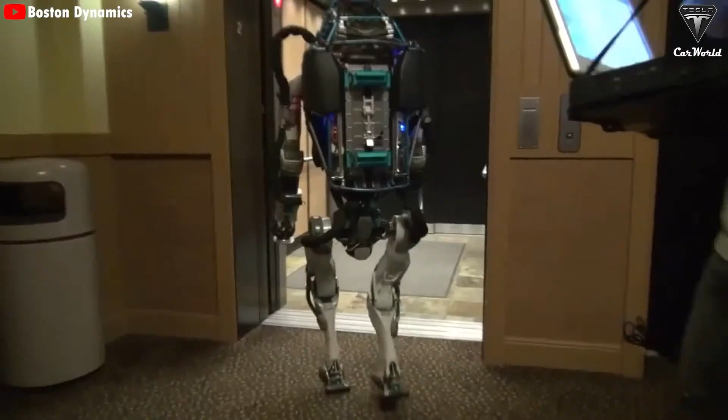After retiring Atlas Gen 1, Boston Dynamics quickly introduced Gen 2, featuring many impressive changes. The original design of Atlas was bulky, but with Atlas Gen 2, it's adopted a more sleek design, featuring longer limbs, a straighter back, and a distinctive round head with lights. However, it differs significantly from the Optimus, which maintains a more human shape, closely resembling a human with features designed to mimic human characteristics. A notable difference between the two robots lies in the actuation systems. Atlas Gen 2's transition to an electric drive system, moving away from hydraulics, characteristic of its predecessor. This change not only reduces noise and maintenance requirements, but also enhances safety.

Compared to Optimus Gen 2, the Atlas Gen 2 appears to have the edge in speed. Atlas Gen 1 was one of the fastest robots, capable of running, jumping, and doing impressive flips. Although specific speed metrics for Gen 2 have not yet been disclosed, its design suggests it retains the agility of its predecessor, as it can stand up and move quickly towards the camera. While Optimus's mobility has recently improved, it's clear that further upgrades are still needed. Perhaps Tesla will have better specs for its Gen 3.

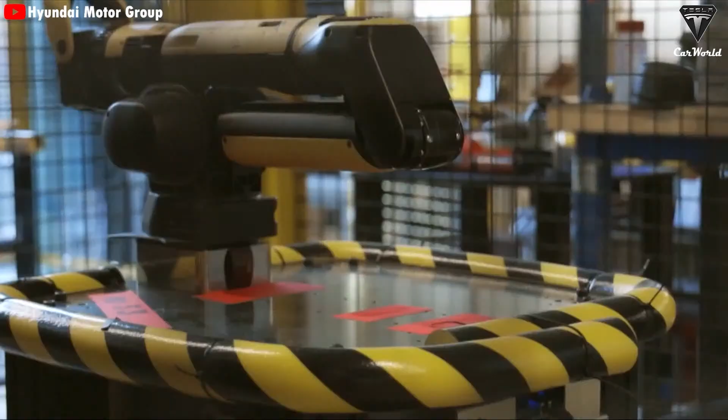In terms of commercialization, Boston Dynamics has announced plans to bring Atlas Gen 2 to market, starting with partnerships with companies like Hyundai. This strategic move indicates a clear path towards integrating Atlas into applications, showcasing its capabilities in industrial environments. While the price of Atlas's Gen 2 has not yet been disclosed, it's expected to be pretty high, similar to its predecessor, which was around $150,000.

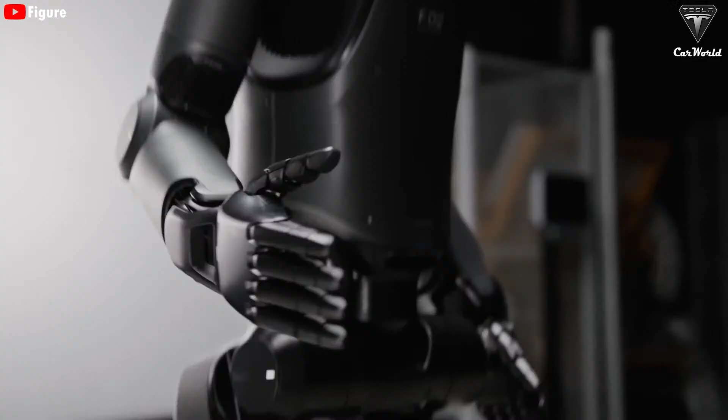Another company Tesla needs to watch out for is Figure AI, particularly with Figure AI 02. The Figure 2 robot demonstrates impressive capabilities, including a human-like hand with 16 degrees of freedom and a production-ready design. Recently released, Figure 2 shows smoother movement and better functionality compared to Figure 1, operating effectively in real-world environments like a BMW factory. This progress is notable as Figure AI only got founded in 2022, allowing the company to quickly leverage modern technologies. Additionally, Figure AI has partnered with tech giants like OpenAI, Microsoft, and NVIDIA, giving them crucial advantages in AI development. This collaboration enables Figure AI to produce advanced humanoid robots more quickly than older companies like Boston Dynamics. Optimus and Figure AI 02 share several similar specifications and have somewhat comparable appearances.

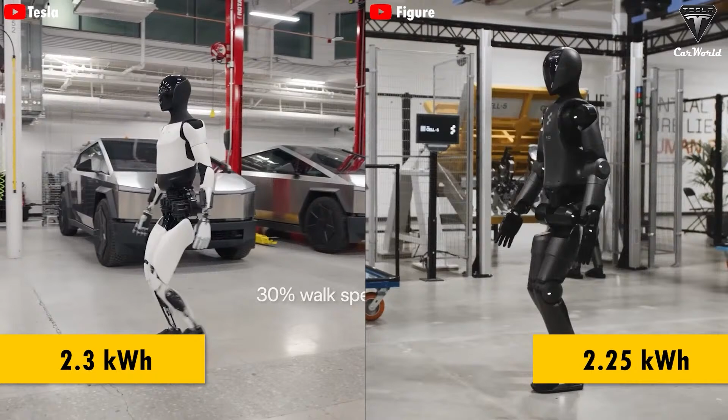Their battery capacities are quite alike. Optimus has a 2.3 kilowatt-hours and Figure 2 at 2.25 kilowatt-hours. Figure 2 can go for 5 hours on one charge. Optimus lasts up to 8 hours. Both Optimus and Figure 2 have multiple cameras and advanced sensors, allowing for exceptional visual systems.

Thus, year after next is likely to be the year of the humanoid robot race, and as of now, Tesla still holds the advantage in pricing. However, there's no easy path ahead, as Elon candidly stated that creating Optimus is extremely challenging and there's still a lot of the tech that needs to be developed.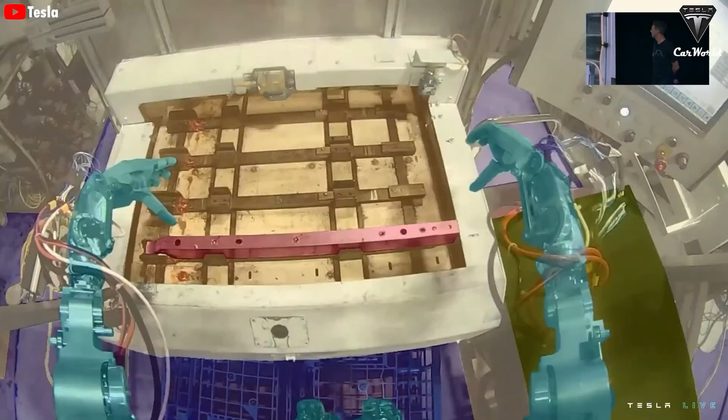Right now, Optimus may struggle to navigate complex terrains, but it eventually will pick up and be able to move across different types of surfaces and pick up objects. The robot's speed is a significant limitation in convincing people, as it only reaches 2 miles an hour, which is kind of slow. But this is just the current spec. The ultimate goal for Optimus is to get a speed of 5 miles an hour. Now, that may take several years. Tesla is determined to reach that.

Additionally, Elon acknowledges that Tesla still requires much better technology for Optimus's components, especially the hands. According to Elon, the hands could account for nearly half the overall electrical engineering technology of Optimus. And that's not hard to understand, as much of humans' intelligence comes from our ability to use our hands to manipulate objects in the real world safely and effectively. Since Optimus is designed to emulate humans, creating a human-like pair of hands is essential.

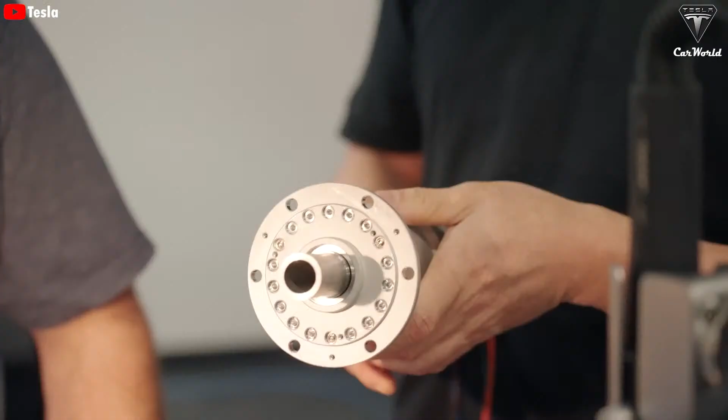The motors are located in the forearms and cables are used to control the fingers. Before, Tesla engineers attempted to place the motors in Optimus's hands, making the hands a bit large and bulky, lacking strength and flexibility. So Tesla decided to put the motors in the forearms, mimicking human functionality, and that's been a lot more effective. Now, it's still too early for us to assert the role of Tesla Optimus. You might think it's kind of underwhelming right now, but it's important to understand that this tech's still in development.

Why criticize something that's not yet even finished? It's not even on the market right now. Tesla will continue improving, and we believe it'll be capable of performing like most humans within the next 5 to 15 years. And after that, we truly think it'll be worthwhile for the price we pay.

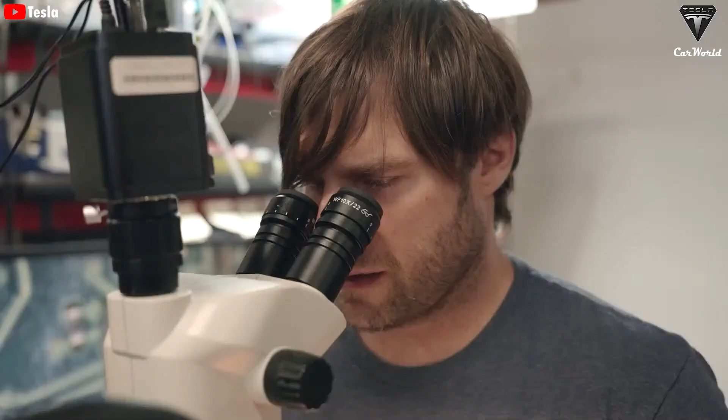Many have assumed that creating something like this is simple, but as we've mentioned, making a robot is anything but easy. Just the hands alone present a challenge, not to mention the new tech innovations that haven't even been invented yet.

In terms of cost, these robots come in various versions. You've got Gen 1, Gen 2, and Gen 3. Gen 1 will be used in Tesla's factories, Gen 2 sold to customers, and Gen 3 is going to be a more premium version that can do a wider range of roles.

As Elon stated on X, Tesla will genuinely have useful humanoid robots in low production for Tesla's internal use next year, and hopefully high production for outside companies by 2026.

Meaning Tesla is eventually going to commercialize their robots for big companies that are facing labor shortages, like Amazon, FedEx, and Walmart. We think there are a ton of factories that are going to spend thousands of dollars each year on Optimus to take over tasks currently done by humans.

So that kind of sets the price range for these things, probably about half the cost of a car. Tens of thousands of dollars for each customizable version. The price is likely to drop as Tesla ramps up production to tens of millions of robots.

Obviously, going from thousands to millions of robots is not going to happen overnight. Elon mentioned that Tesla wants to offer both rental and purchase options for the Optimus, while the rental service will launch sooner. There's been a long-standing vision of humanoid robots in homes.

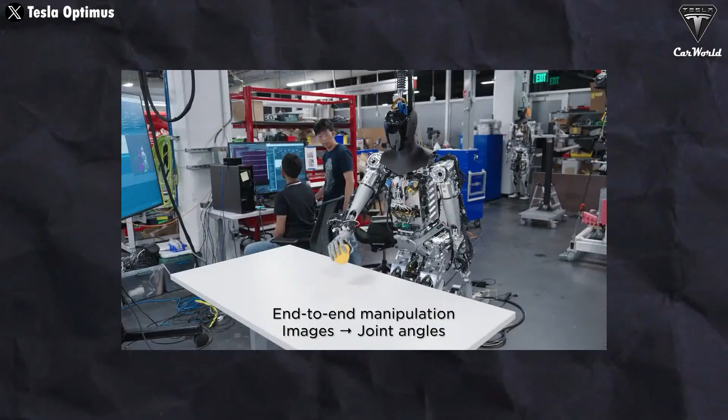However, we're still quite a ways off from making that a reality. There are plenty of reasons for that, including safety ones, like the potential for robots to harm humans if misused, as well as economic factors.

Like any groundbreaking technology, humanoid robots come with their own set of challenges and ethical considerations. The potential replacement of human workers raises concerns about job security and unemployment. Striking a balance between human employment and automation will be crucial to ensure a smooth transition.

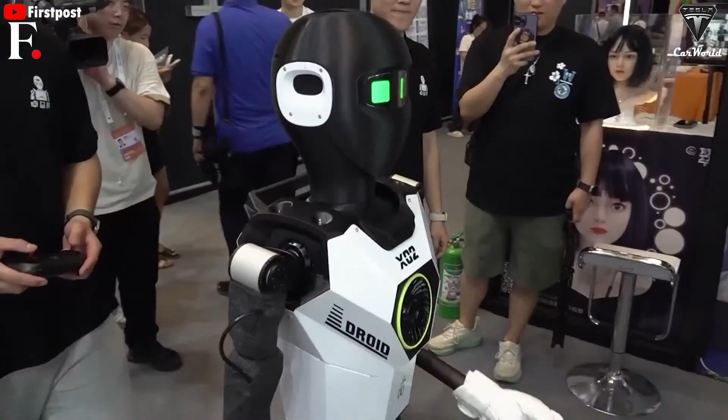Ethical considerations become especially important when robots are used in sensitive environments for personal companionship. As these robots get more advanced and capable, questions arise about privacy, consent, and ethical responsibility will all inevitably arise.

The initial use cases are likely to be in industrial settings where human labor is exhausting, expensive, and hard to come by. These are the environments where robots can get fine-tuned and optimized while still performing productive work, generating revenue or cutting costs.

Again, this is an area where Tesla's got the advantage over its competitors. The company has big factories where it can deploy Optimus without the need to sign complicated agreements with outside partners.

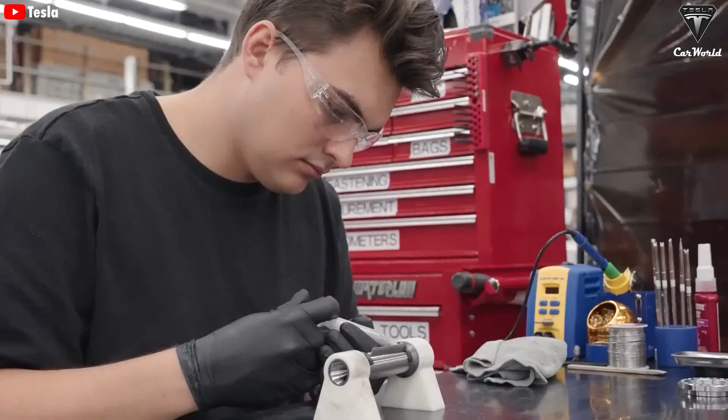Elon has laid out a bold vision for the Optimus robot, expecting it to change the way we live and work. The combination of advanced technology and low production costs allows Tesla to operate these robots at an affordable price, along with enticing promotional programs.

If successful, Optimus could be more than just a consumer product. It could become a companion that enhances the quality of life and frees people up from boring, mundane, and downright dangerous tasks. Despite the many doubts and challenges, the progress Tesla has made with Optimus in such a short amount of time has put them at the forefront of the humanoid robot field.

The combination of advanced technology and production capabilities helps Optimus become an integral part of daily life for people in the future.

So, we want to ask you, the viewer—and by the way, thanks for watching—what do you think is the most important aspect of developing a humanoid robot like Optimus? Is it the utilities, the mobility, the AI, or the ability to interact with us humans?